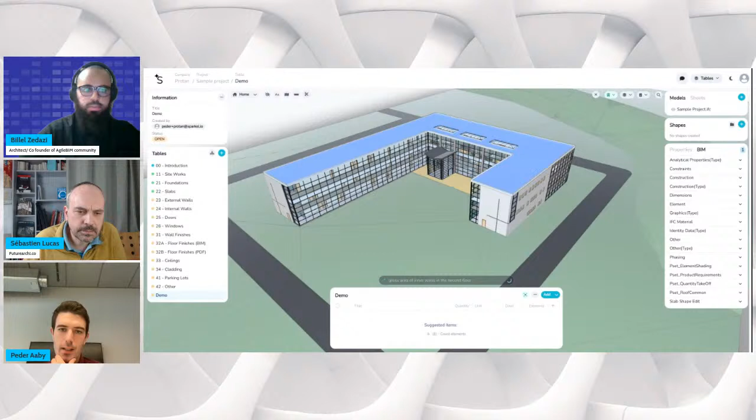That's always interesting. But the point here is that at this point, especially at contractors where not everybody is necessarily a heavy engineer, suddenly everybody can access the quantities and information in the different BIM models and kind of get it.

So then we can switch back to the presentation.

So what's actually happened here in the past years? It seems like large language models, which is a sub-part of artificial intelligence, I can mention. A lot of the artificial intelligence we have is not large language models, but we have large language model support as well.

But basically, this is a short example: previously, in 2016, if you translated some text to Spanish and then from Spanish back to English, you typically lost 50% of the information in the translation. At the point today, where we instead use something called neural machine translation, which is these new large language models, you can translate text back and forth with 90% accuracy, which means we are almost there, that translation is almost perfect, which is very interesting.

And I'll try to go over how that maps to BIM models very shortly.

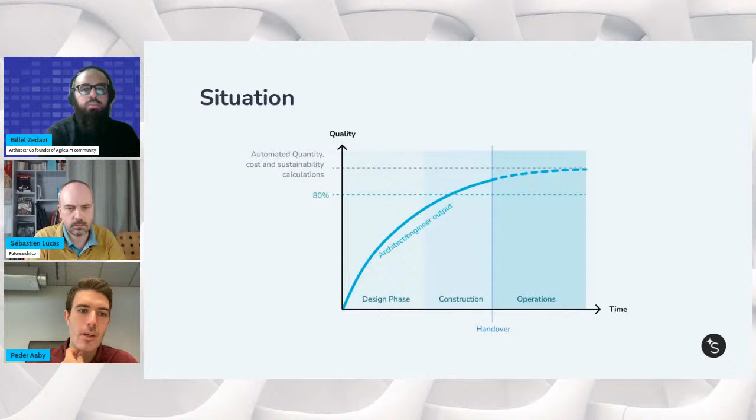So just very quickly, we are currently in a situation where when we model a building as an architect or engineer, from the contractor's point of view there is a building, we can look at the geometry, it's 80% there, but it's not 100%. And when it's 80% and not 100%, it makes it actually kind of useless, because a building is not debatable—there are certain things to be built. I need it at a higher level, but putting all the constraints to get it at the higher level so I properly trust it costs a lot.

Yeah, and what you see right now is quite often we get a lot of garbage in—requirements change, architect changes—and to be brutally honest, we have talked with a lot of people that have worked with 5D BIM, including heavy cost estimation directly connected to the BIM model.

But if you really talk to the people that have worked with 5D BIM in that kind of sense, you find out, was it really a big success? Maybe not—it was a bit too hard.

And then why don't we standardize what I mentioned previously? Way too many people—there are different architects and engineers for every project, and it's very hard to put on the hat. It's very hard for an architect to create the perfect model for a contractor.

But what's interesting here is that in the 80% model that the architect and engineer created, all of the information for the contractor is there. 99% is there. Just to give a very quick example, like when you model a wall, and as

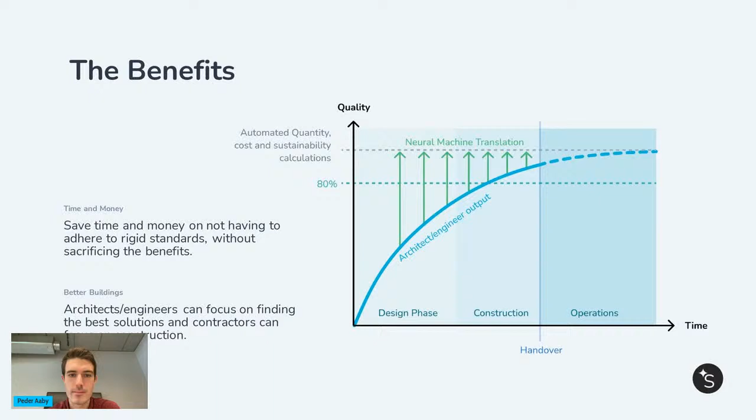We have a lot of AI capabilities doing this, but another big part of it is just that we give full control to the contractor and cost estimator. It's possible to do essentially anything you want in Sparkel with a model: create new geometries, create new attributes, split and extract those attributes. You can do it all.

This ended up as a quite short presentation, so feel free to ask questions afterward. But here are some quick takeaways. Construction projects are inherently unique and unpredictable, which makes automation and standardization at scale very difficult. Recent advances in machine learning and AI have become, in many senses, really good at interpreting unpredictable and unstructured data. When you put it all together, it all makes sense, and you can give the output the contractor wants anyway. So garbage in, garbage out is not always correct anymore.

Also, perfect models - if you try to reach for that 100%, where you invest a lot of money into creating the perfect model for the contractor with architects and engineers - what we see is that it even doesn't work in practice because of the agency and context problem. You're creating something for a receiving party, so even though it tells you what you need, it's very hard to deliver because you don't properly get it, so to say.

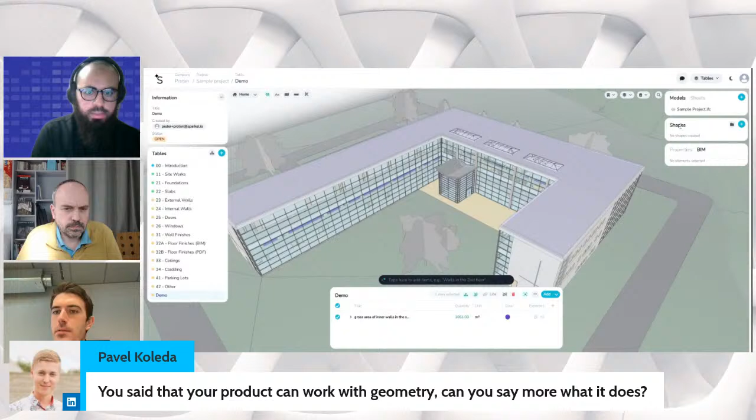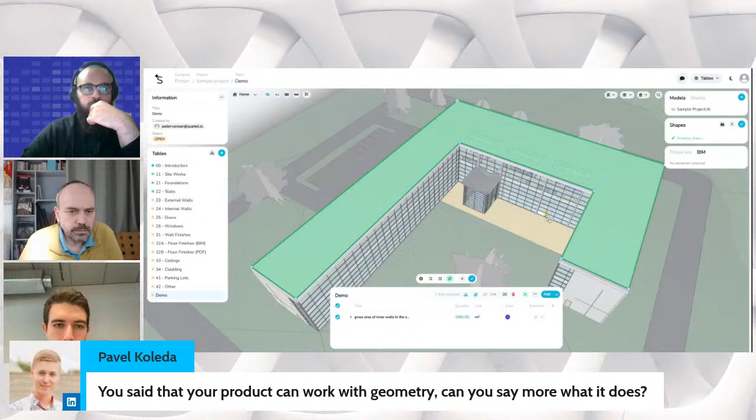We have this concept called shapes, which is basically custom geometry for models. It's also used for cost estimation in PDFs that we support. You can see that I created, with a click, custom geometry that I can self-adapt. After creating this, I now have a new element that is completely valid in the Sparkel domain that I can use for takeoffs, and I can do everything.

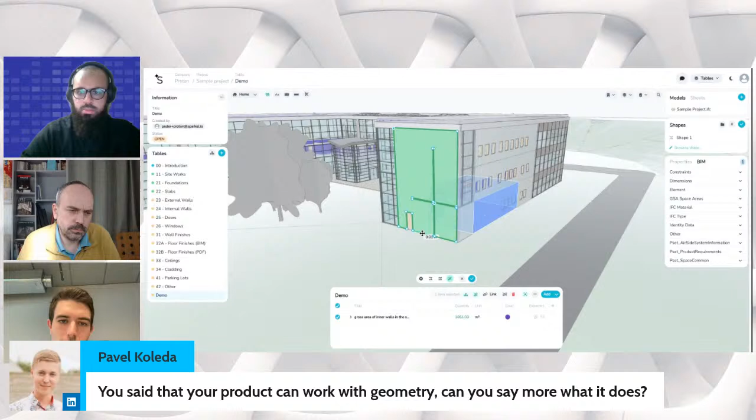A very common use case for this: for example, this is the showcase model from Autodesk. You can see here a wall that goes across 3 stories. This might make sense for an architect, but very much might not make sense. So what they typically do is split this up, adapt it, and use the new geometry as they want.

We're also implementing this already in the platform, it's just hidden, getting released in a week. We're implementing collision detection when creating this custom geometry. So when I click here, it would actually just be inside of this, because typically the geometries that contractors want are restricted by the surrounding geometry, while what I'm talking about right now doesn't make sense for architects.

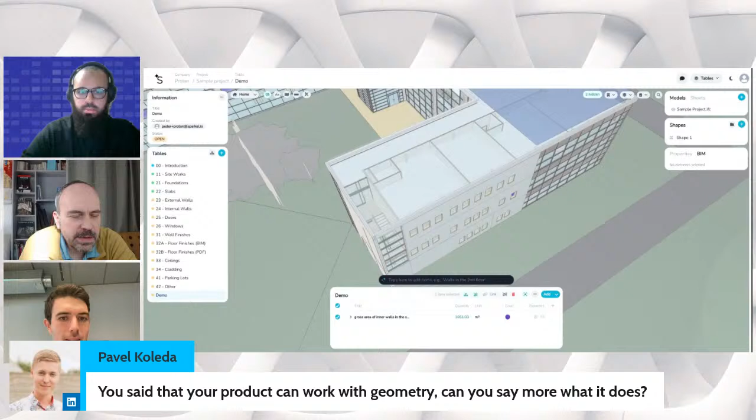But then I switch also to the tab. It means that for contractors, they can use the geometry already existing in the model if it fits them, and if it doesn't fit, they create a new one in parallel. That's what they do. If you are a contractor, you know there's never the case where the model fits your needs perfectly.

Sometimes they extract the quantities from the model itself, and sometimes they just sit and purely use shapes to extract geometry or quantities for the entire model. It's quite fast when you know all the shortcuts and everything.

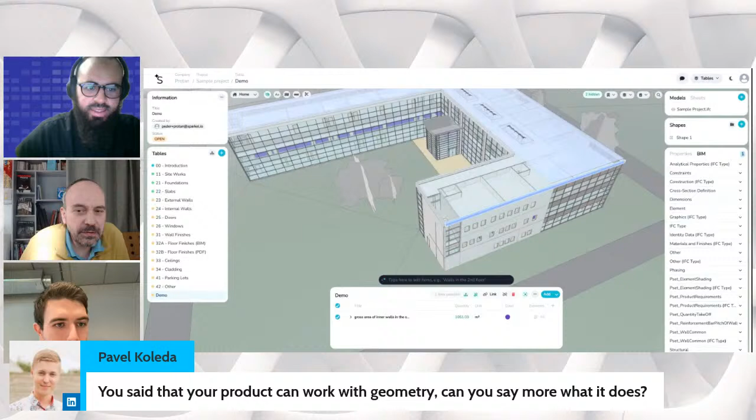If there are contractors in the public, you can share your experience, your bad experience with a BIM model, it will be interesting for us. If people viewing this video are contractors, they can share in the comments because it will be interesting. As an architect, we don't imagine this kind of problem, so it's interesting.

I think that's something - if there's a contractor or cost estimator, just throw it out there, because I think this is a hidden problem even for architects. This is me putting it a bit bluntly, but did you know that the models you create are actually pretty useless for the contractor?

They will never tell you, but you kind of always see it with all of the frustrating and weird requirements that you get. It's the contractors trying to fix it, but it's also just a bit of frustration, like why don't you read my mind? Which is impossible also.

Practically, without your tool currently, what are contractors doing? Are they building a new model from scratch, or are they using the BIM model from the architect and modifying it, or what do they do?

So there's a bunch of workflows. We also have workflows for that, so there are actually quite a few architects on our platform. When contractors are on our platform, typically they get a model from the architects, they upload it into Sparkle, show things in Sparkle and create things in Sparkle, and say, okay, this is not possible, or can you adjust this, and is this a better proposal from the construction point of view? They use it essentially for design reviews and collaboration, to collaborate between architects and contractors.

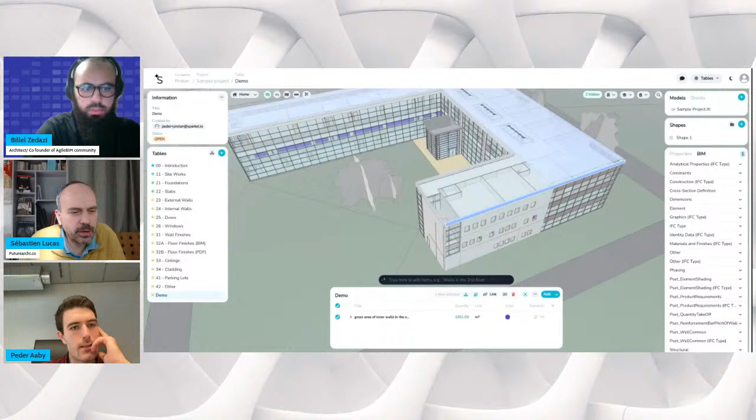Yes, so what you can do is create a new element and add a comment on it, and say, is this a better solution? But there is no workflow management like 'this is done, this is accepted or not,' this kind of stuff? No, you don't have it.

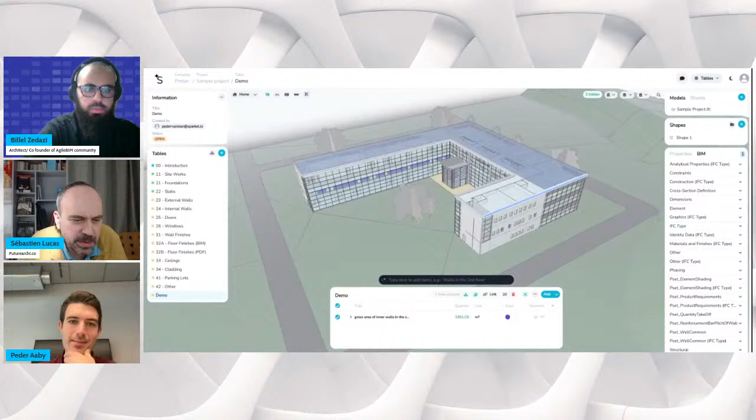We have a lot of those kind of features as well, like model coordination, I think it's often called. But where is it in the app? When we make a comment, you could make a comment, for example, just to explain how it is. I can do like this, for example. Is this the correct properties for the roof? And then I have a comment there that I can see, also attached to the model.

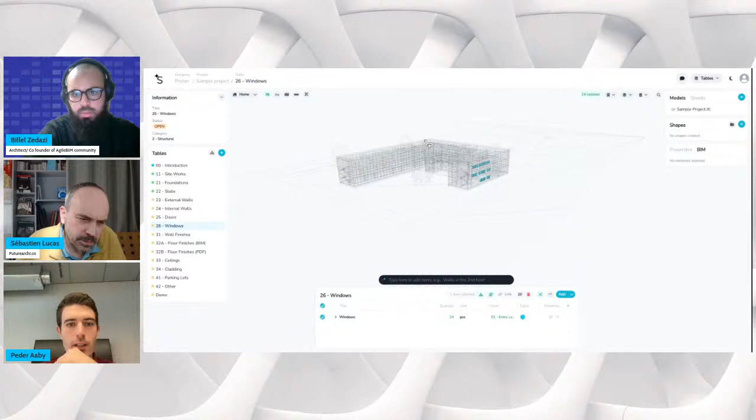And then I can also do it like I want, say, just in this Windows takeoff, for example. I can share it with external parties. So I can go here and share it. I can share it to all of you, like a Google Docs link. And it can be a public link, or you need to invite people to the platform, so it depends on the use case. You can share with a public link, for example, but then we have to restrict the features quite a bit, like it's view-only essentially.

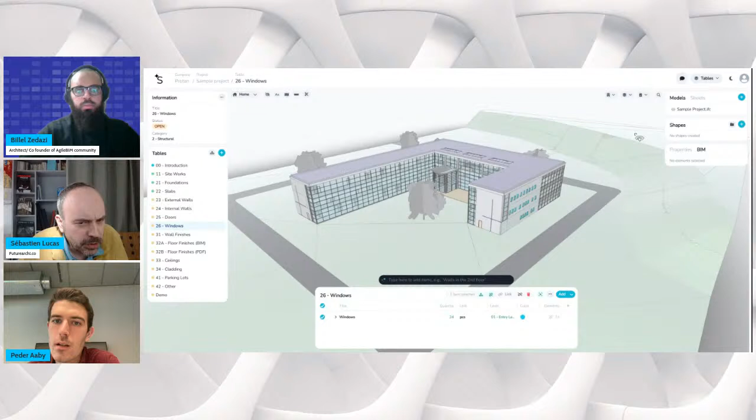But when architects are on our platform, they're quite often invited, which is more like you are allowed to create comments, etc. Then you want a different thing. And is it possible to access this comment directly in the field with a mobile phone or small device? You could do that, or is it not very adapted?

Right now we just fundamentally use adaptive kind of technology, but PC is the thing we consider supporting right now. What people essentially do in Sparkle is create these takeoffs and customize them by dragging.

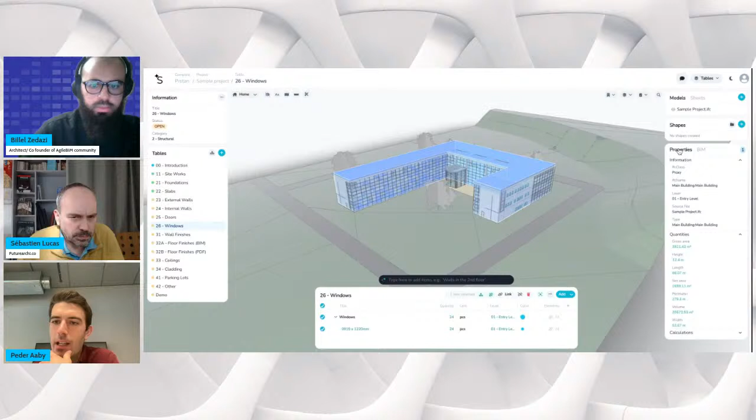So it's not so much for the construction phase itself, but the preparation of the construction, the engineers that prepare the construction stage? Yeah, so it's actually used in both, more of the cost estimation, but also... There are a lot of, so I said contractors don't like BIM, that's not all true.

A lot of people try to extract value out of it, and they, for example, use it for invoicing. That's a very typical use case: today I built these walls, so I'm going to invoice for the quantities of these walls. And then they do that continuously with Sparkle, even with the shapes concept, where they select the part of the wall that they built, do a quantity takeoff, press share, and send it to the building owner or whoever's paying the bill.

There is a new question from a Chinese user, or I don't know. Is there an API for...

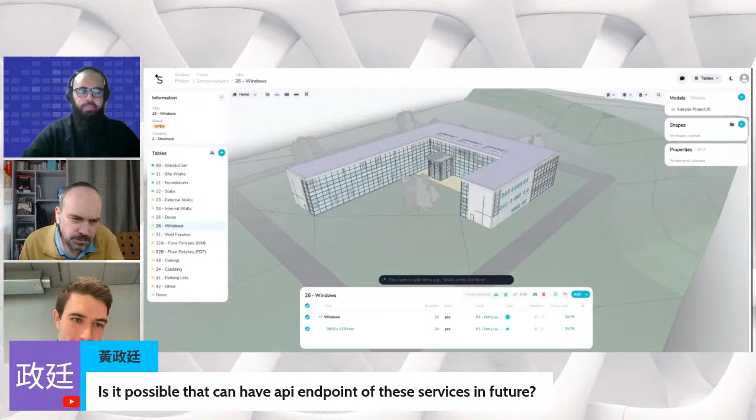So the thing about the platform is the API is new, like half a year old, but yes, we have some basic API endpoints for model uploads and similar. We don't have API endpoints for extracting the data yet. Instead we use the standard in the construction industry, which is Excel. So you can export all your data to Excel sheets. But we also plan to expose the data through APIs in the future, so we can more seamlessly connect with other platforms.

Because the connection with Excel means that every time you need to do some manual export to Excel, or is it possible to automate the process so you have an Excel sheet automatically updated or something like this? Great question.

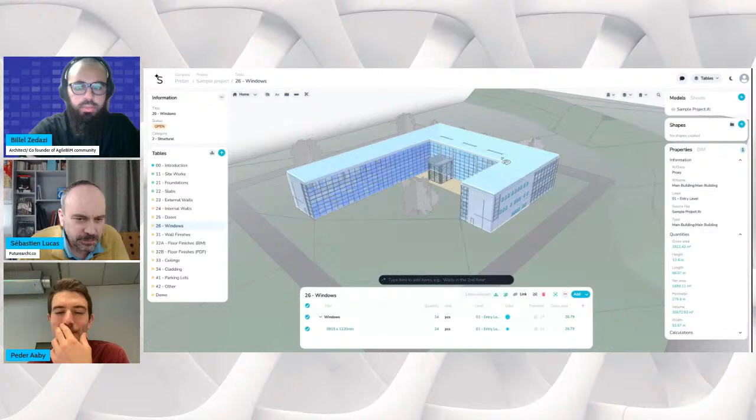Sparkel has so many hidden powerful features, but basically you see a very basic table here. This also has full Excel support, which is also a hidden feature. We have an actually quite advanced formula interface that supports something called Math.js, so in this area I can just do gross area times 2.

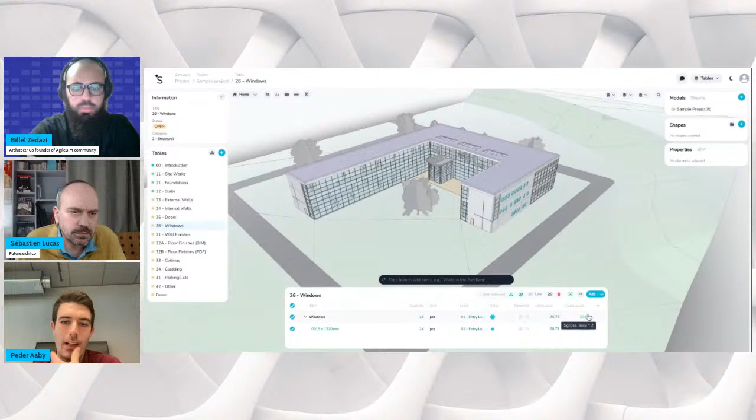This is a basic example, but you can even do these calculations on an individual element level. You can multiply it by cost. So a very recent news for us is that, I would never have imagined this, but a cost estimator consultant in Germany told me that the de facto standard for cost estimation there is I2.

Have you heard of them? No, what's that, a software? It's a software called I2, ITWO. It's the de facto solution for cost estimation of construction projects in Germany, and they have a lot of features that we don't have. But still, a company in Germany on their own initiative is now actually working on removing iTWO in favor of Sparkel, because Sparkel has so many customizable, deeper features that they're basically able to build their entire cost estimating process in only Sparkle.

Have you got price data to be able to do some pricing? Kind of not directly in that way. That's one of the larger features we are missing for that use case. So why did they decide to go for Sparkle even though that's obviously a big miss? That's something we're actually talking to them about, because we want to figure it out. But they like the platform so much that they're willing to take on the pain of it.

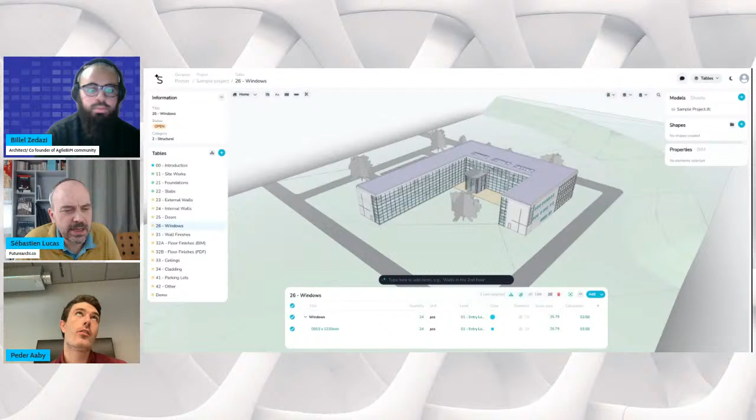So you use a Vision API to view and understand the map which is in PDF, or only in text documents? We use GPT-4 for text documents, and we use something called the Segment Anything Model from Facebook to read the drawings. Okay, so for drawings you use other technology. Yeah, we use another technology.

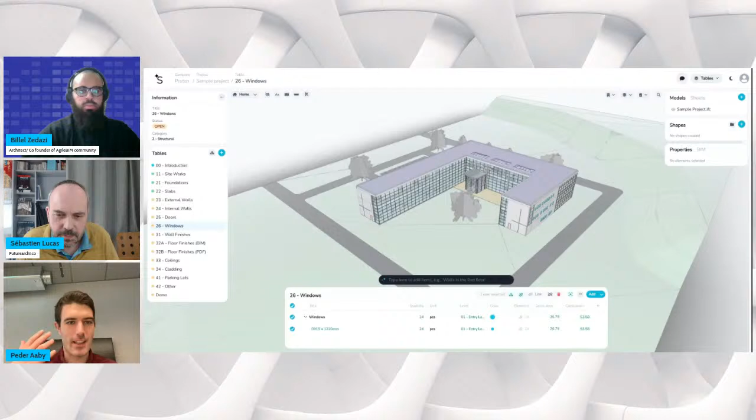I can go on forever because it's very interesting. OpenAI, for example, is working on multi-modality, where reading the drawing and talking to the text is the same. But like was previously mentioned here, you have the hallucination problem - the AI also makes up stuff. That's quite common.

We have another question. Do you think it is possible to explain to AI which building is designed correctly and whether all the rules are followed? After all, this cannot be conveyed only in text. I understand for the construction code, I suppose.

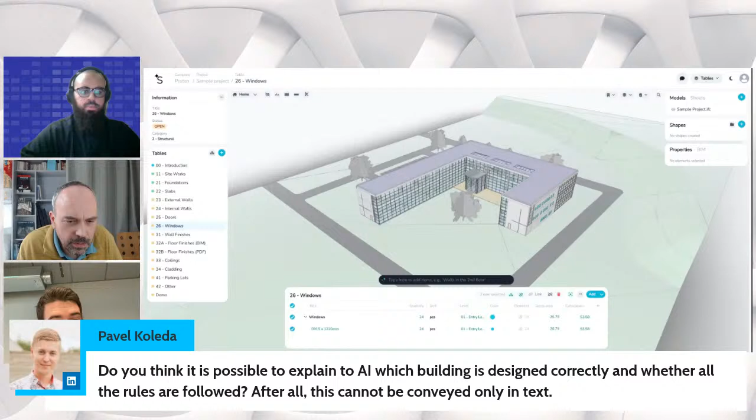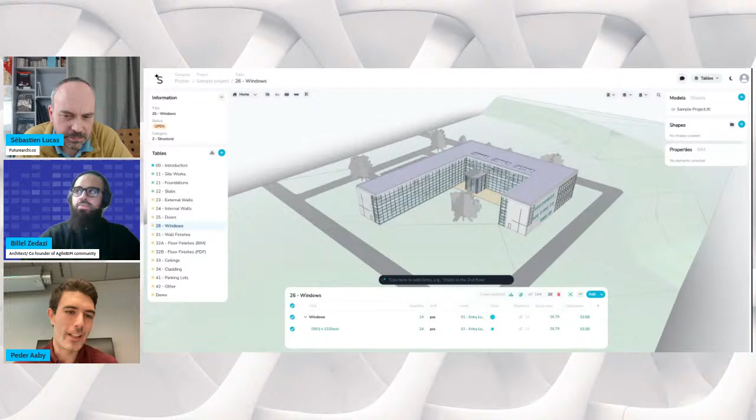After all, yes - I'm going to say yes, Pavel. I think that's one of the big challenges right now - when people talk about AI, it's like everything, the new thing is large language models. The thing you are describing, Pavel, you can't only use language models for that, but is it possible?

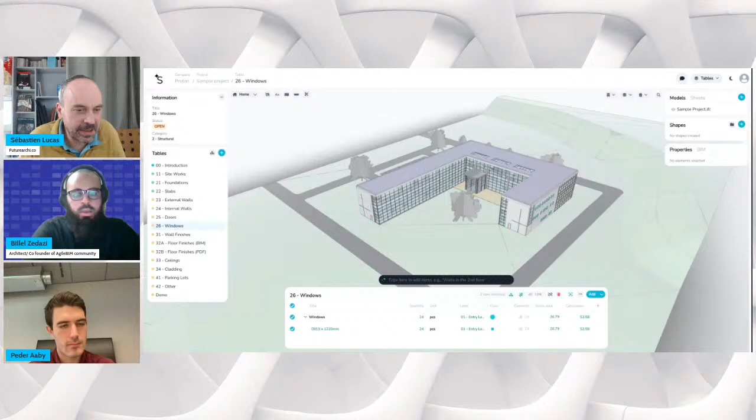Yes. I know a few projects that work on construction code, and I think one of the challenges is to gather all the data depending on the country, because each country has a separate construction code. First you need to understand the geometry, and secondly you need access to the data, and the data needs to be stored in a way compatible with AI research. So it's feasible, but currently I know a few projects, one in Switzerland, one in the US, so every time it's a country-based project.

Yeah, exactly, I think that's kind of what we're working on here as well, more in the contractor stage - understanding the building in a more combined way, the properties, the geometry, the requirements, the corpus of data that is building requirements.

I think it's good, for me personally it's a matter of time, but it can take time. But there is, for example in Switzerland, I think, or in France, I don't know - there are some countries where you need to pay to have access to the construction code. So if you use AI and this paid data, are you allowed to do it or not?

I don't know. That's the tricky thing - what OpenAI does is they don't tell what they're trained on, they just do it. But they're also getting sued by the New York Times right now, even though they've admitted to training on New York Times, but they have a good legal service to handle this issue.

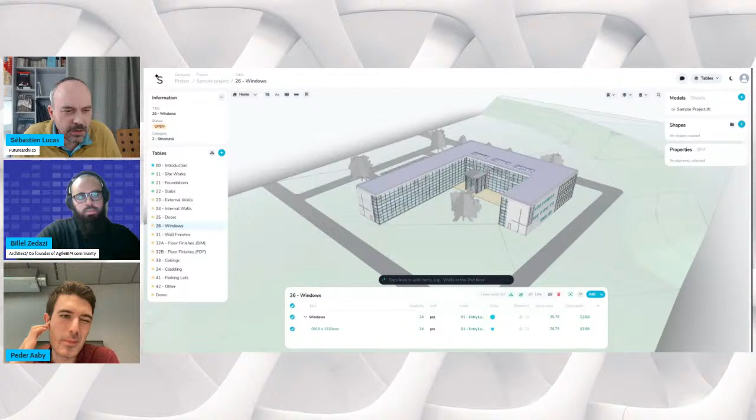You mean which one, ChatGPT or GPT-4 in this case? Because I did a few tests by uploading some IFC file. Maybe I didn't know what to ask, but I was a bit disappointed. That doesn't work at all.

What I think is very funny is that when I say talking with your BIM models and share this on LinkedIn, a lot of people think that we upload IFC models to GPT-4. But that doesn't work, and I think it will never work. So what do you do?

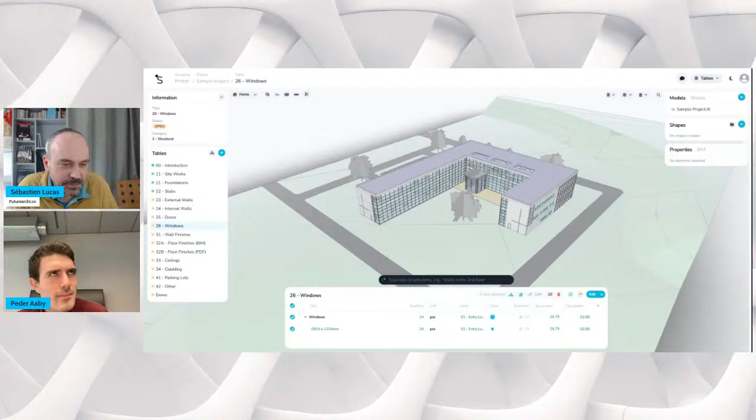I'll get quite technical here. It has a lot of understanding of an IFC model. It understands that a window is IFC window, or a wall can be IFC wall or IFC wall standard case. That's what it understands. But we have also trained the AI on the platform itself.

So the AI understands the human context, it understands a lot about us. And then it understands how our intents map to filters for searching in the BIM model. The platform itself does the searching after that - it creates filters, it doesn't create brand new data.

You mean that we explain to it what we want, and then it filters the IFC data for what is interesting and relevant? Yeah, that is what it does. It looks up the IFC data, so it actually behaves a bit...

I think what we have... that's probably a bit too advanced. In artificial intelligence, there is a concept of agent - essentially a large language model that you allow to operate on its own. So you tell the AI 'I want to be rich,' and then it tries to make you rich by thinking for itself. You can try - doesn't work.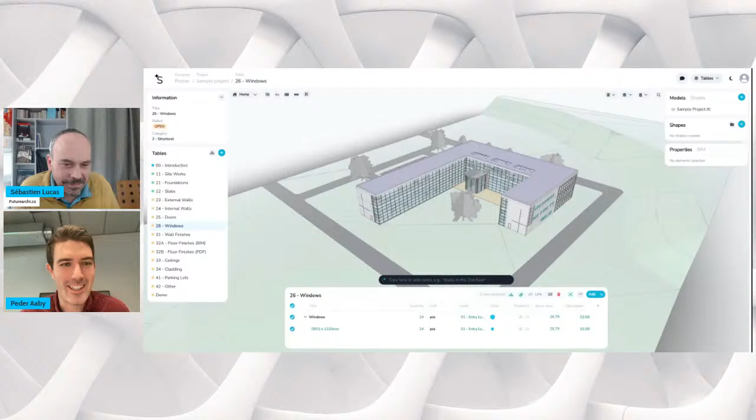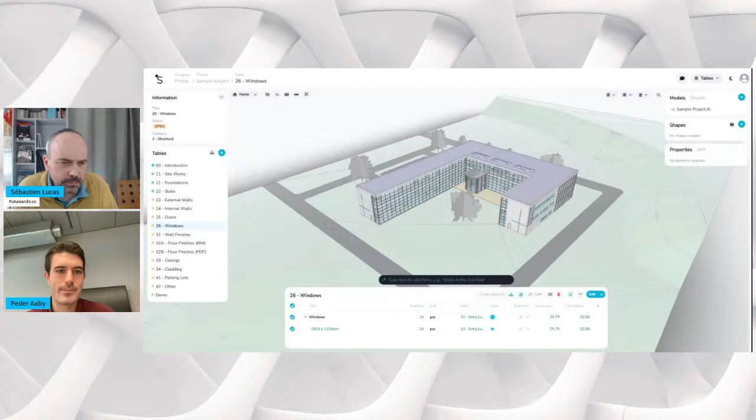But what works, and what we've done here, is I think the kind of implementation of agent that actually works, where we ask it something and the AI itself looks up in the data of the BIM model. So what actually happens when I ask it something, say 'Windows by type,' is it's interpreting this query and fetching all of the windows from the BIM model.

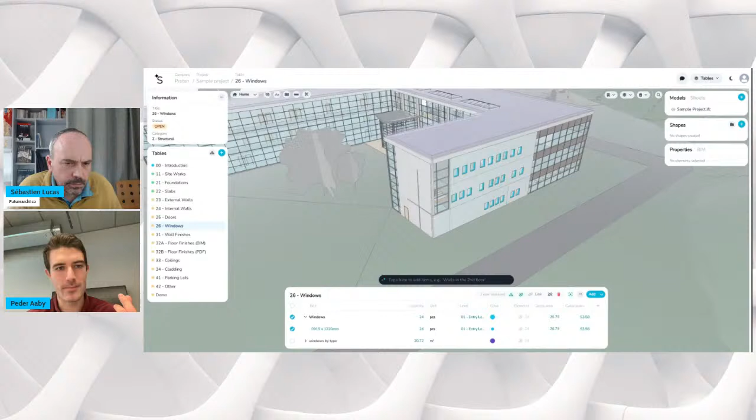And filtering them on the properties that it finds interesting. So it works like... it talks with itself and the BIM model for about 3 iterations, and I think 3 is like the informal limit there. You can make the AI do 3 meaningful operations on its own if you really hold on to it, but if you try to do 4 operations, then it falls apart.

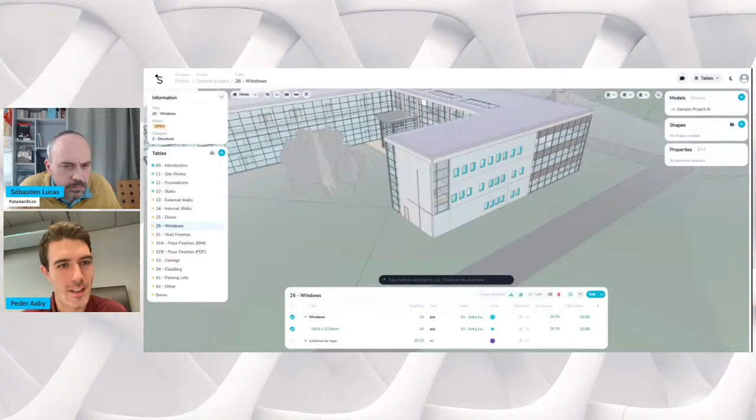Also, when you're working with deterministic data such as a building model - especially one that is to be built - one thing is the design, when you're more open it can be more generative. But this is the building model, this is to be built, so don't make up new windows here. We have a lot of layers to enforce that. There are 24 windows here - that's not open for interpretation.

From a novice point of view, you talk about 3 steps or so, but for me, I just make 1 step - I want a window and get a window. But behind the scenes it's more complex than that, I suppose. Yeah, there are, yes, that's like, I think, yeah. So it looks like 1 step, but it does 3.

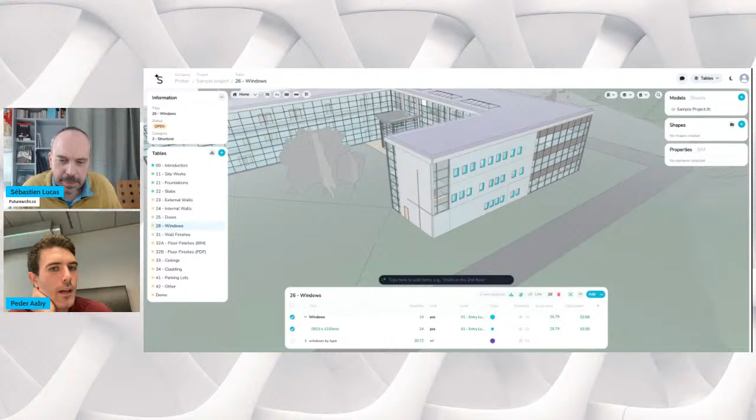There's another question from Pavel who asks if you have problems with token limits - talking to the ChatGPT API or OpenAI API maybe. We had a lot of problems before the 128K limit. Now I'm very technical here.

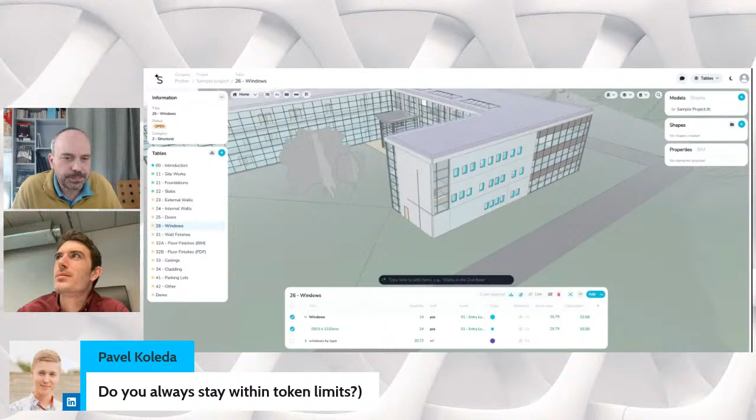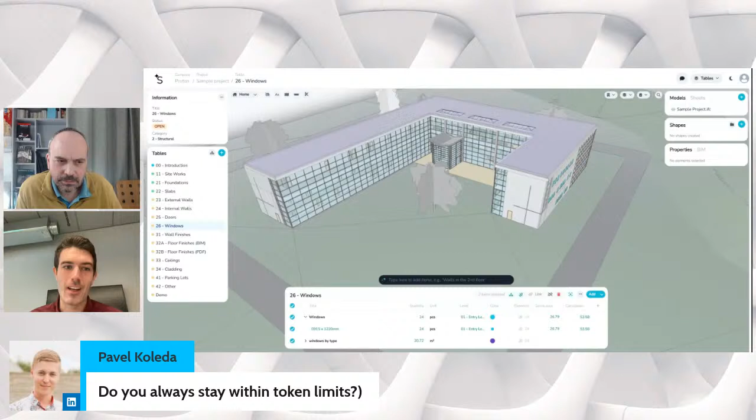So the thing is, I actually made the filtering AI almost perfect, which we haven't released. It can do much more complex queries almost always. The issue was that when I made it perfect, since it's an agent that self-decides what to do, it started to overflow itself with information. So the answer is, in the current implementation, yes, we are within token limits. But when I made it a proper perfect AI, the limitation was the token limits and the filtering of data. So I'm waiting for the next generation with higher token limits or better reasoning before I release the perfect AI. It crashed into token limits, so it doesn't work for release to customers, but it was impressive.

Okay, maybe we are going to finish if there is no other question. I don't know what you think, maybe you have a perspective. What are the next steps in this application? What do you want to do next?

So we have actually quite a few loving users. The closest next thing for us is to work on our communication and making the features easier to use, because they are so valuable for our loving customers, but we see that too few people get going.

But the next step after that is more large-scale automation. I showed you I created a shape on the roof, and I did some minor adaptations on it very manually. Doing it full-scale, we can do that for the entire building in one click. So I think generating more full-scale detailed design will actually also be quite close in the product, like generating paint areas for all of the building.

This demand, for example, does it come from your users, or is it something you think will be useful for them? It's a combination, but we are mainly community driven. We have a small but very active community that reports bugs and feature requests and all of their use cases.

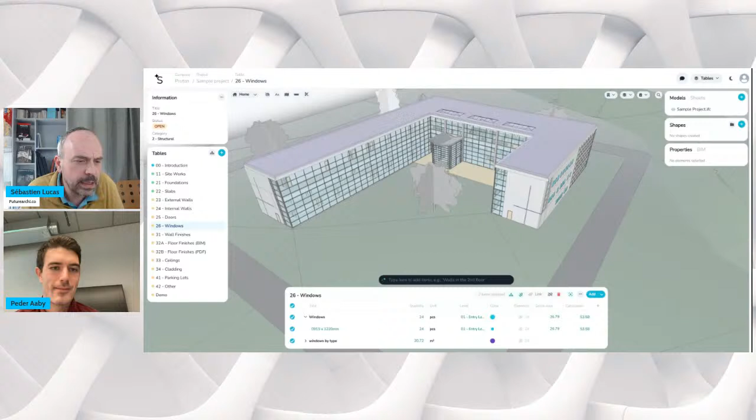So mainly through the Discord channel you exchange with this community, or other channels? Let me see if I have the link here. If anybody wants to join, I'll share it, I'm not going to spend a lot of time on it. I'll post this page as well. It's a very small community, but very active, I'd say. It's funny because we have like 50, 60, 70 people in our community, but there's another community about a database technology with 10,000 to 20,000 users on their Discord, and ours is actually more active. What's important is to be active. Discord is a tool that maybe some aren't used to, but it's okay. I think a risk we're taking in using Discord is that I'd say 90% of our customers will never go on our Discord server. But the people who sell the product internally, our champions, are more geeky and know new technology, so they're the people we also want to reach on Discord.